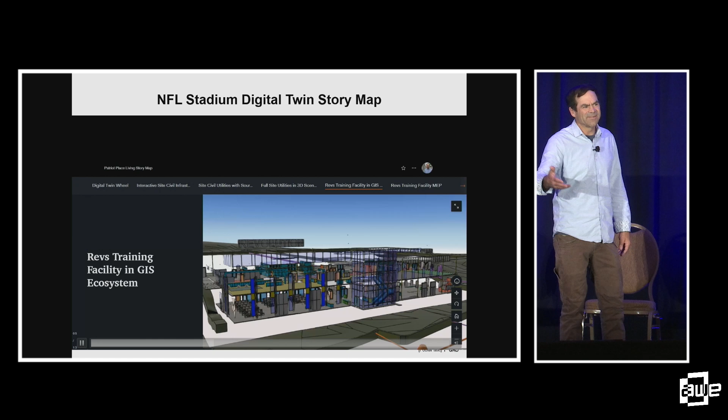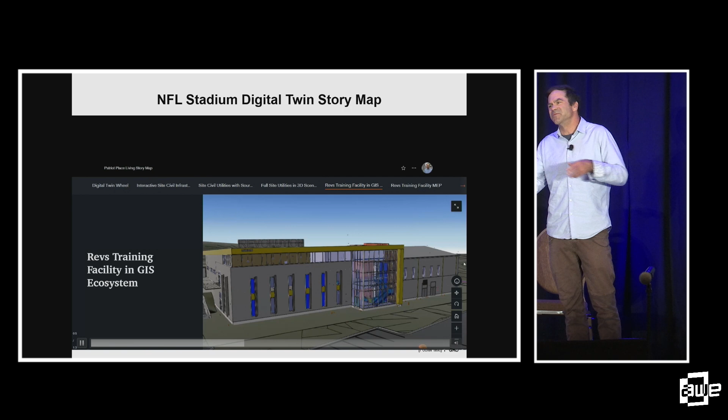Here's a little video - I don't think there's sound. This is simple; it doesn't even have to be 3D, it can be 2D, but it's about bringing this data in. Here are six different underground utilities around the stadium, mapping what these are and giving people - whether on computer or phone - the ability to see all these attributes: what it is, the type of structure, and then they can add things, like John serviced it on this date, or this isn't that type of structure and needs an update. You can also link in actual PDF drawings you may have. This would be those utilities in 3D - you can bring in architecture, engineering, all the different trades, as well as GIS, because GIS is the world we're used to, being the blue dot on our phone. Bringing out all that data about our asset so we can be the blue dot around it is important. We can look at any type of item here.

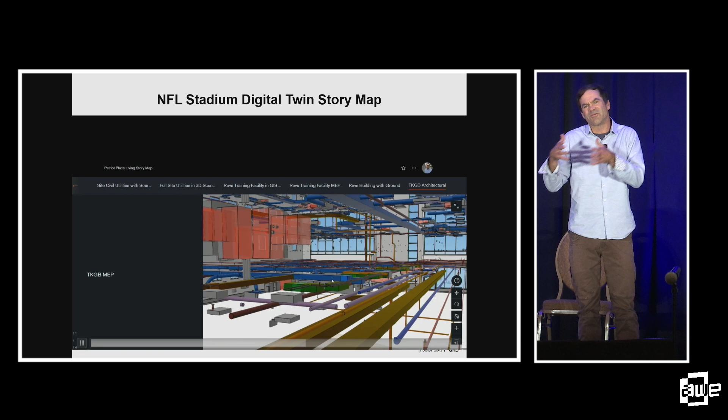You could also have live sensors, maybe some pump that has a pump curve, and you can be looking at those type of things. So really just bringing all of that data from the design team out to the management team, you can start now, and you have that data all brought together, right?

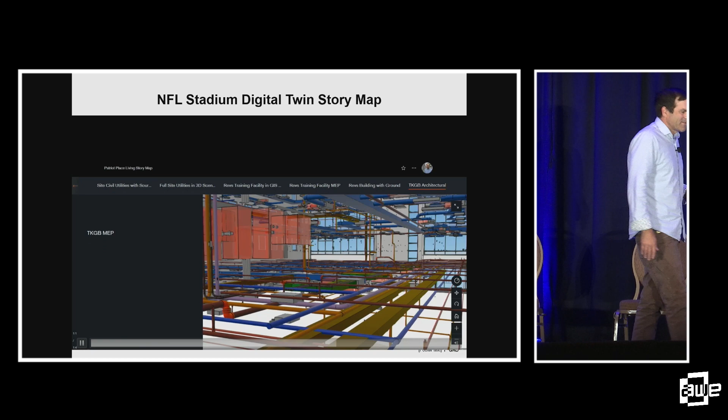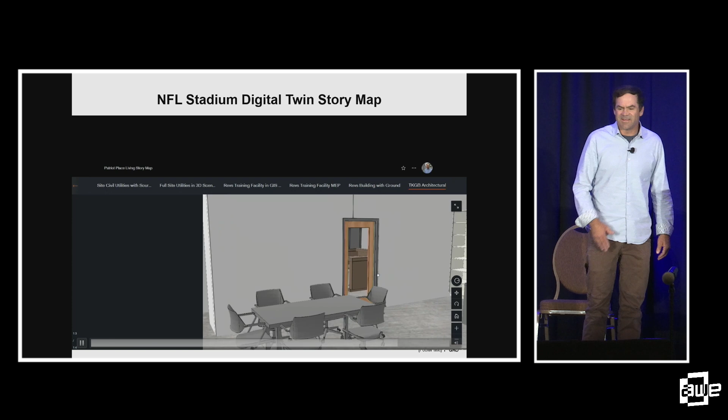You know, so many projects, no matter how complicated, you kind of have to get the data, standardize it, which is what the digital twin really does, do your analytics, and then visualize it, right? And so now you can visualize every item in these type of models with their information associated with them, and you can keep that updated. Anybody can look at it, and you can get as complex as you want.

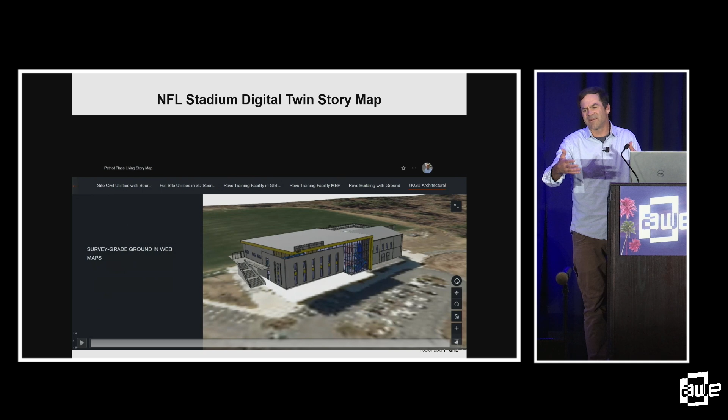So here's a lot of GIS data along with some civil engineering data and architectural data all kind of brought together to give you context for the site. And once you've brought this to where it is in the world, then anything like AR is really simple because that building knows where it lives in the real world. We've brought it in so you can hold your phone up and look at it.

So why are digital twins central to XR for these real-world assets? Because all that data is coalesced and standardized for the visualization, right? We saw those attribute tables there that were coming together, so those are standardized. And once again, what's that one cell in the attribute table that's in common for everything on the planet? It's location, right?

So those coordinate systems have to be aligned for that part to work, right? GIS uses this coordinate system to say where something is based in the center of the earth. Civil engineers use a really precise state plane-based system, and architects don't use anything at all. So you have to bring all that stuff together to know where it is in the real world.

And so once you've done that, then any of that visualization stuff is really simple because it knows where it is. So we want to, once again, just be the blue dot with our data. That's what we're used to in our day-to-day life, and so we should be able to interact with our asset data that way.

So as we can have the visual, we can have it on mobile, we can have it 3D, as well as things like this specialized analytics, like a specific energy curve that we could click through to. And you can almost think of it as sort of this virtual site model, where instead of having file explorers, going through and finding all the data just through files and folders, you can just have a visual file explorer. All the data's there, you can click through it, you can click to any information just visually, spatially.

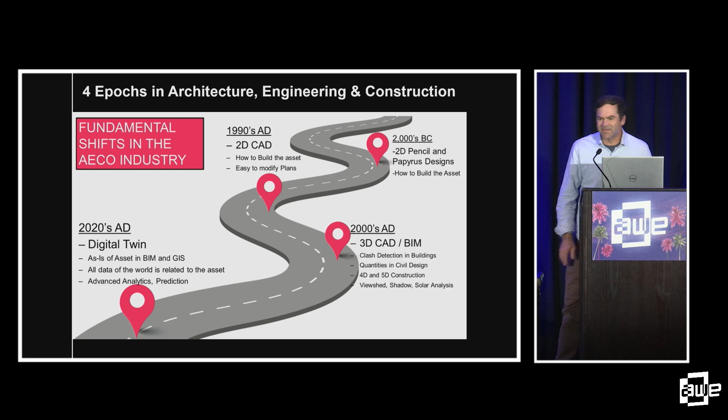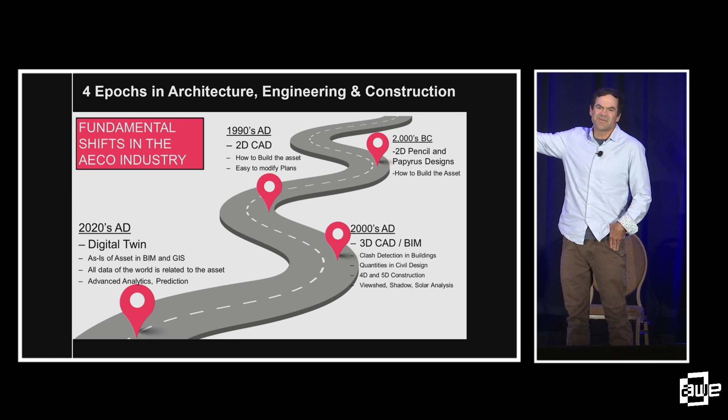And then just as an interesting aside, in this architect, engineering, construction industry, there's kind of only been 4 major epochs. When they built the pyramids in 2000 BC, they had the pencil and papyrus and could draw it. Then in the 90s, you had 2D CAD, where people could draw things in 2D and easily modify it. Then in the 2000s, we started to have 3D CAD, where architects are designing buildings in 3D.

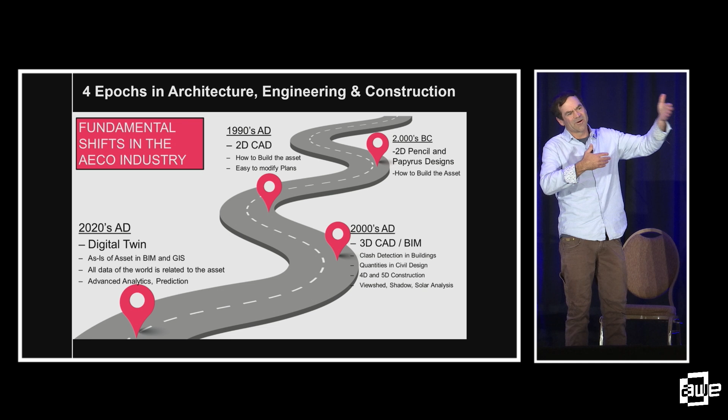And then you can do things like clash detection, right? Is that plumbing fixture clashing with the structural elements? Those type of things. You can have viewsheds. And now we're just in this new era of the digital twin, where we're bringing all the data of the world together. So for example, on a solar farm, that solar farm can read the Doppler radar and say, oh, there's a big cloud coming. I better warn the grid, I'm about to lose power, that this is coming.

So we'll talk about visualizing digital twins and augmented reality. Watch a little video with some technology by VGIS that does some visualizing. I'm not sure if they're here, but if they are, check them out or go to theirs. And we'll watch a little video here.

Gonna play. There we go. See if we got.

And then that data can be kept up to date as well, right? As things change, as you add data, so you keep this as-is of the site. So we can also compare, right? With AR, when that design knows where it lives, we can compare it when they're building it and say, oh, are these guys actually nailing this? Or are they not? Did they forget some piece? And so with the digital twin and AR combined, we can start to really add a lot of capabilities for people to do all of these type of things.

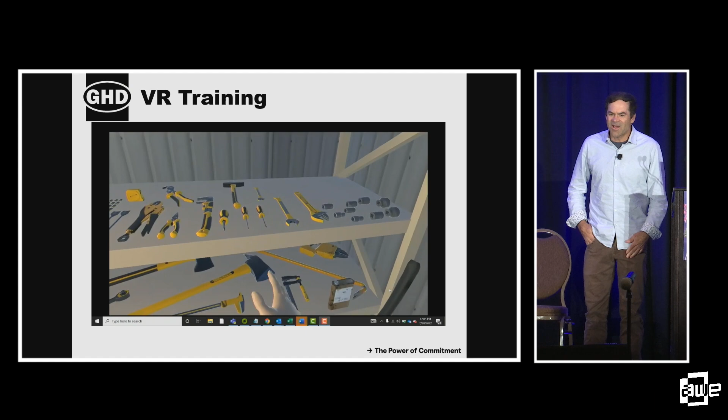This was where a fuel truck pulls up. You have to do these wheels in a certain order to get the fuel truck. Then this is training on changing this part out. They have to go pick the right part, look at the diagram to see what they need to do, and read it out.

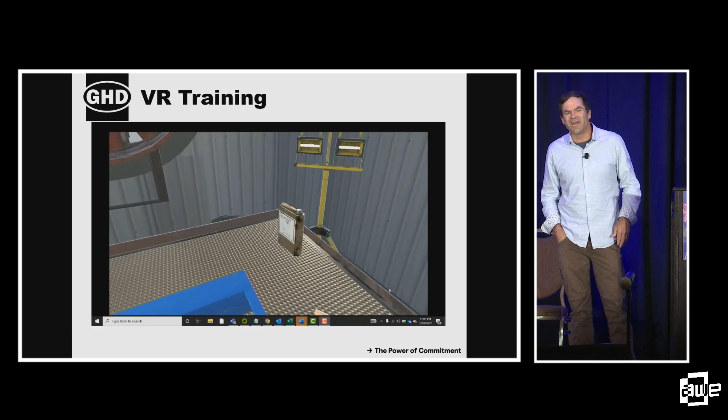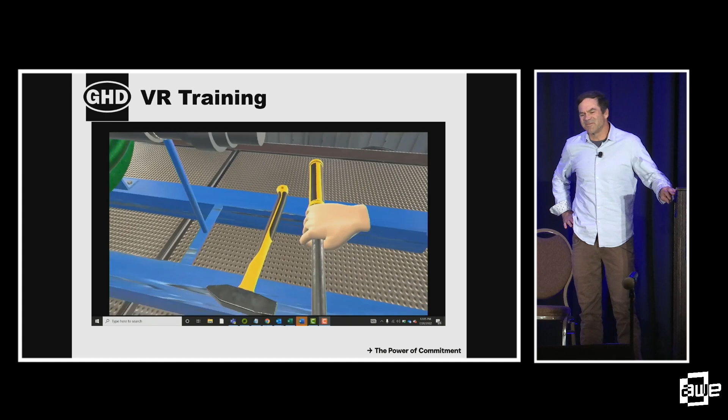So once again, a great thing for seeing if you want to hire the person. Also, as we've heard plenty at this conference, the new generation wants to train a different way. They're not going to read a PDF manual and really be engaged, but they do engage this way, as we've seen in our statistics. I think I saw like 75% retention when it's gamified, but 15% when you're reading a PDF.

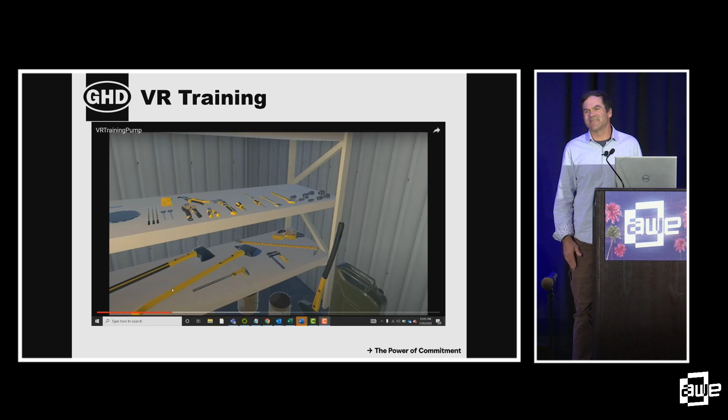So we can do a lot of applications that way. And the training, I find, is really the biggest lacking thing at companies. I do a lot of digital transformation consulting and assessments, and with any new technology, there's kind of three legs.

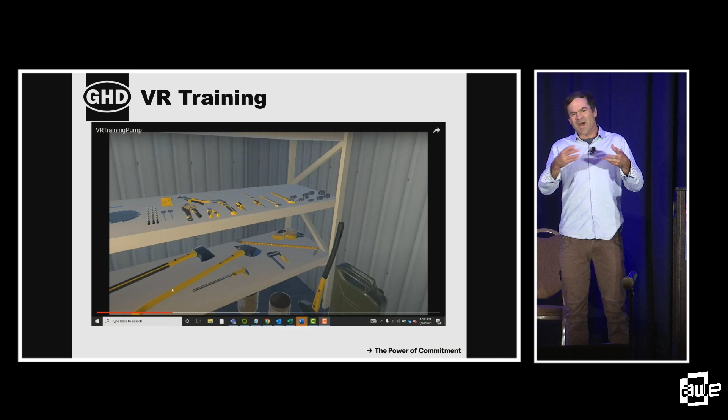The people, process, and the platform. The platform, the technology, everyone does that - everyone wants to buy the shiny car. Every company does that fine. Then the process is the standards, how you're going to collaborate. Some companies do that well, and if you put enough hours and resources in, you can do that leg of the stool pretty well.

But the training, the people part, the training, keeping people up to date - I find hardly any companies ever do that properly, really putting in thorough programs. I find that's the leg of those three stools that takes the organization through this digital structural change to be able to do that properly.